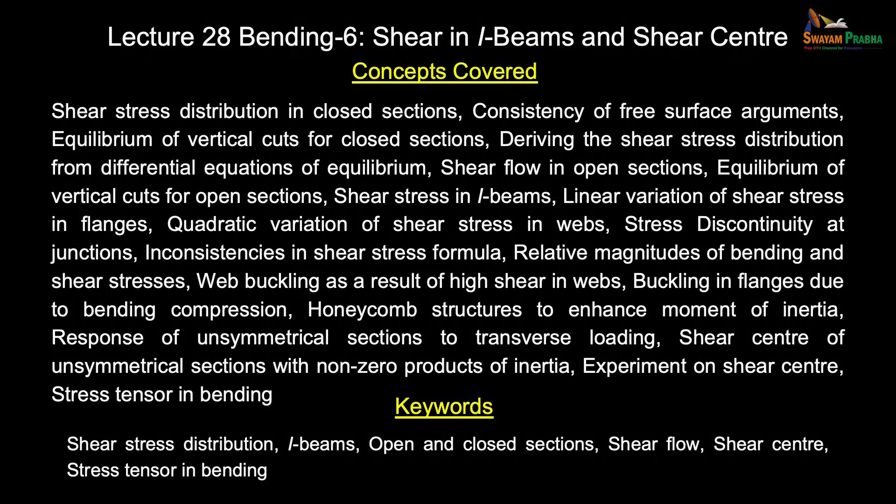Let us continue our discussion on shear stress developed in bending. We are going to discuss certain subtle concepts which are quite important for you to understand the limitations of the equations that we have developed, and also how to use them in solving actual real life problems.

We started with shear stress distribution in a rectangular beam where we had made a horizontal cut, and based on that we have been able to get an expression for shear stress. You should recognize that even when the beam transmits a constant shear force, we saw a variation in bending moment from cross section to cross section.

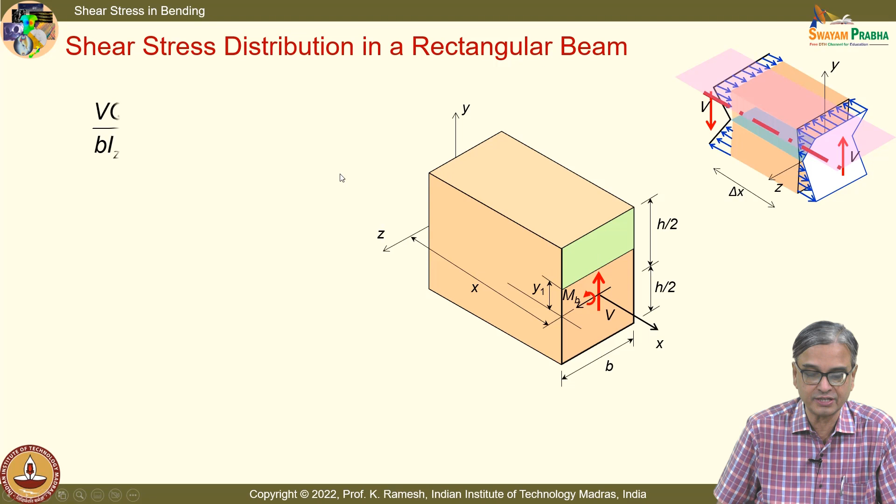You have learnt that you have to find out the Q, first moment of area. That helps you to find out what is the shear stress acting on this surface, which is located at y1. We have also written down a generic expression in terms of integrals, so that when you have a non-rectangular cross section, you can find out this Q comfortably, which you are taught in mathematics courses.

So I get this as V by B I_ZZ integral y1 to h by 2, y b dy, and when I integrate and substitute the limits, I get the expression tau xy equal to V by 2 I_ZZ multiplied by h by 2 whole square minus y1 square.

Obviously, when this area becomes larger and larger, Q also will become larger and larger, and hence your tau will be larger, and you have this maximum when this reaches the neutral axis.

You also have on the top and bottom fiber Q is 0, which we have reasoned out from free surface discussion. Whichever way you have the discussion, you should get one unique answer, only then your mathematical analysis is correct. That is the reason why I go back and forth.

We are also going to determine the shear stress by solving differential equations. That also we will do. All of them will converge to the same answer. So what we understand is top and bottom fiber should be 0.

As I told you, at the center of the cross section Q is maximum, and you get the shear stress variation like this. This is the parabola. I also emphasized all along that shear stress varies linearly in the case of torsion, and bending introduces axial stress which varies linearly over the depth of the beam.

And the moment you come to shear, you find that it varies parabolically. So that is a first observation.

When you make a horizontal cut, we found when the bending moment is varying along the length, there was an unbalance. To keep the cut element in equilibrium, you need to have shear stresses developed. That was the idea.

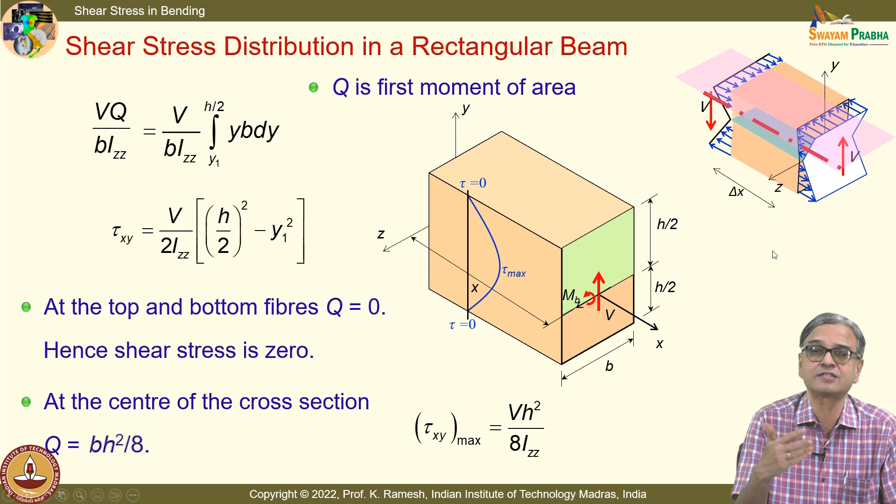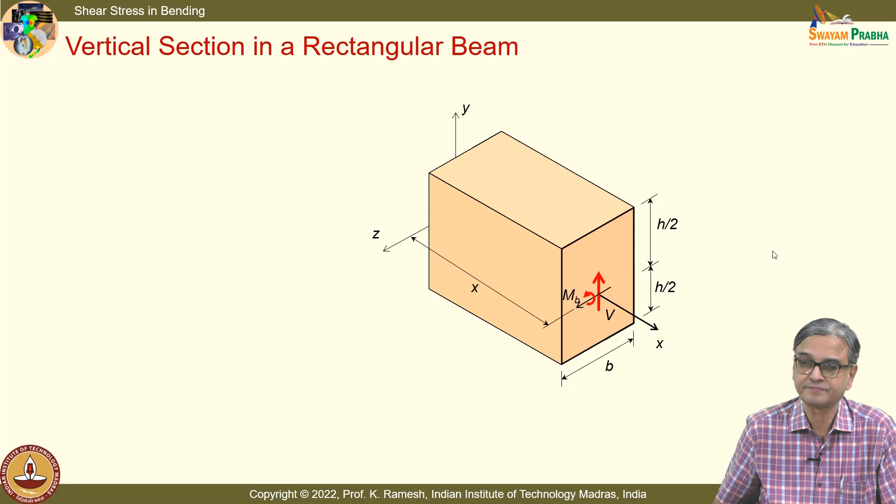Then I gave you a homework. Why not I make a vertical cut? Instead of horizontal cut, let me have a vertical cut and separate out the beam. Let us see when I take the free body and list out what all quantities act on it, we will get an idea how to handle it.

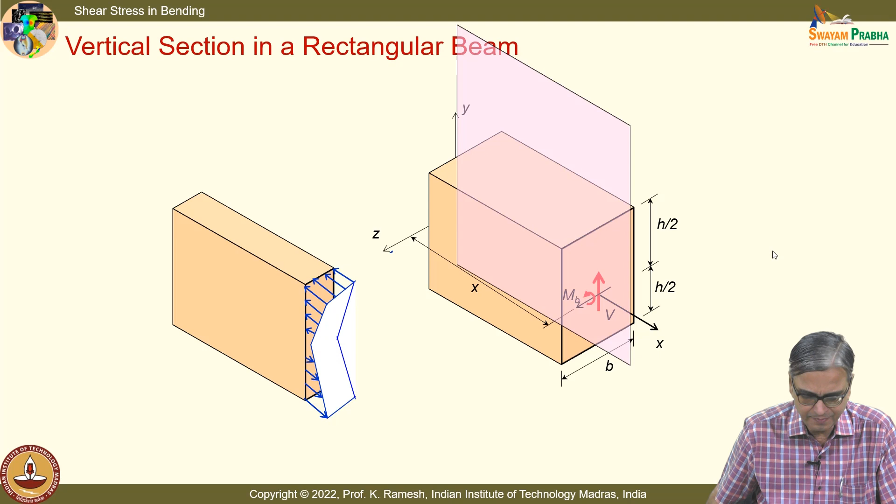So I have the cut portion taken out. Is the idea clear? I have asked you to cut like this, and bending moment varies along the length of the beam. So I will have bending stress variation like this on this surface and bending stress variation like this on this surface.

And you know very well, when I substitute the bending moment, which was smaller in magnitude here, I will get smaller stresses, and I will get larger stresses on this face. This is difficult to draw, I have drawn it to the extent possible. If you can improve the figure further, you are welcome to do so.

Now the question is, will this element be in a state of equilibrium or not? Do you require any additional stresses developed, particularly on this surface? This is a surface that is cut. What is your first appreciation of your understanding? You will have to find out what is it that you have to calculate.

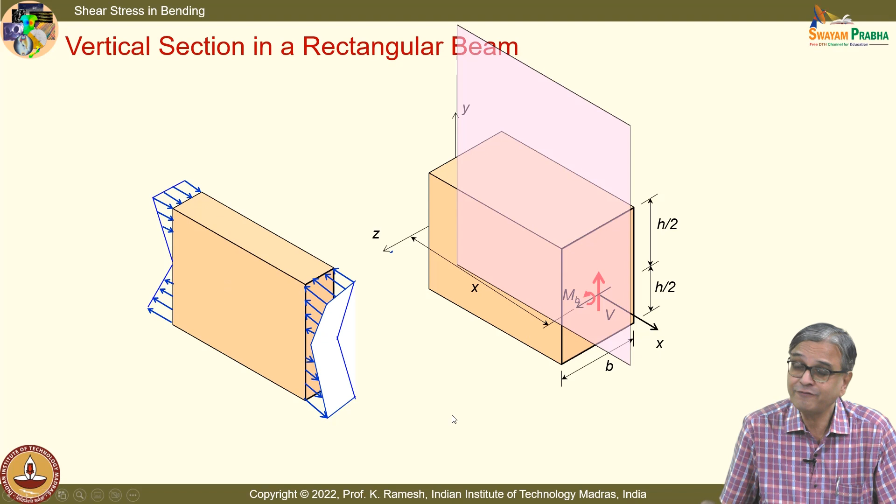What is the net force acting on this face? What is the net force acting on this face? Net force is 0 because I have taken a vertical cut. If I have taken a horizontal cut, net force is not 0. Is the idea clear? So what is the net force?

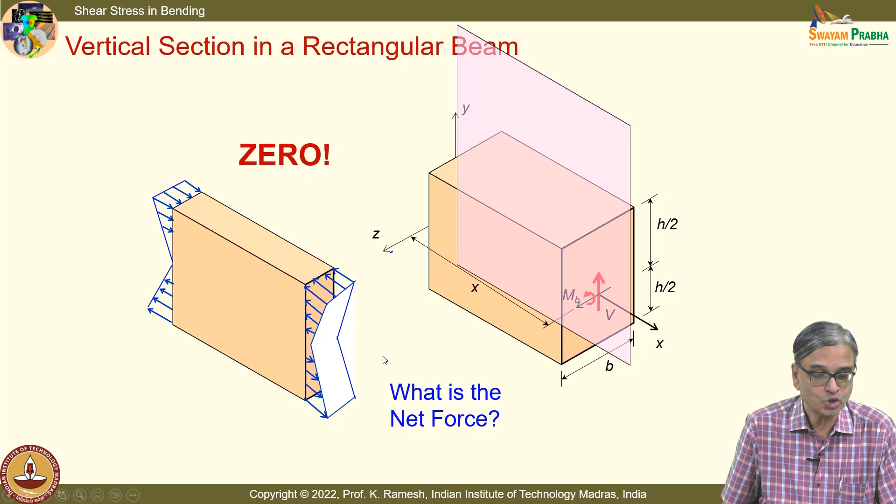And because there is equal and opposite from the bottom to top, it is 0. So you do not have any shear stress developed on this face of the element. Is the idea clear? Very subtle point.

Then we move on to another cross section. See, I said whatever bending equation that we have developed can also be applied to open sections. And move on to the open section.

See, you will have to find out the shear stresses from fundamental understanding. It is not like you have your eyes blindfolded and simply use the equation that you remember, and then get the shear stress. It is not like that. Because I am going to take a counter example.

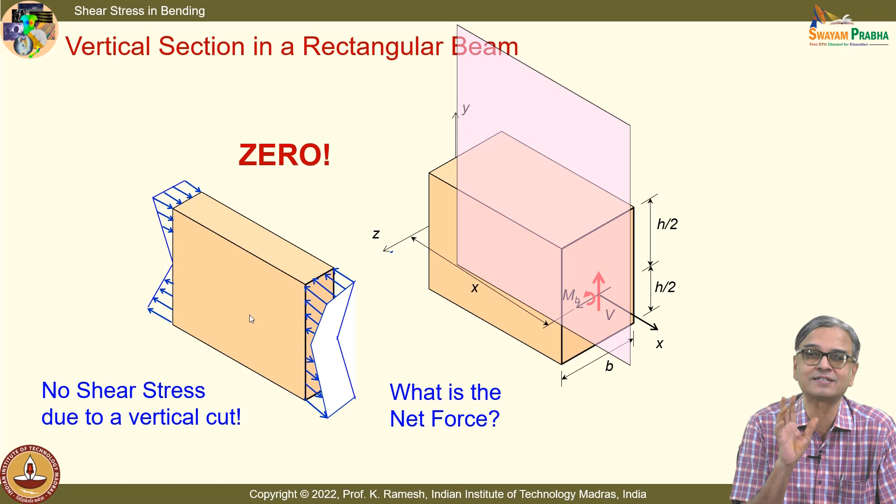I have always been saying shear stress is parabolic in nature. I am going to show something different. And I am going to show when I make a vertical cut, I am going to have something interesting. So it is problem dependent. You will have to understand how the unbalanced force comes into play.

So before we get on to that, we will also use an alternate approach to find out the shear stresses in the case of rectangular cross section. In this course, we have not been utilizing the differential equations of equilibrium. We developed it in the first few lectures, isn't it? We have determined what is the equations of equilibrium, and we will not consider the body force here.

We will use those expressions to find out the shear stress. So you will also get an idea that you can also find out by solving differential equations. It gives a flavor of it because there is no great mathematics involved. It is very simple. If I had to solve this as a boundary value problem, I would have to develop a lot of mathematics before I could solve it, but this I can get a direct solution.

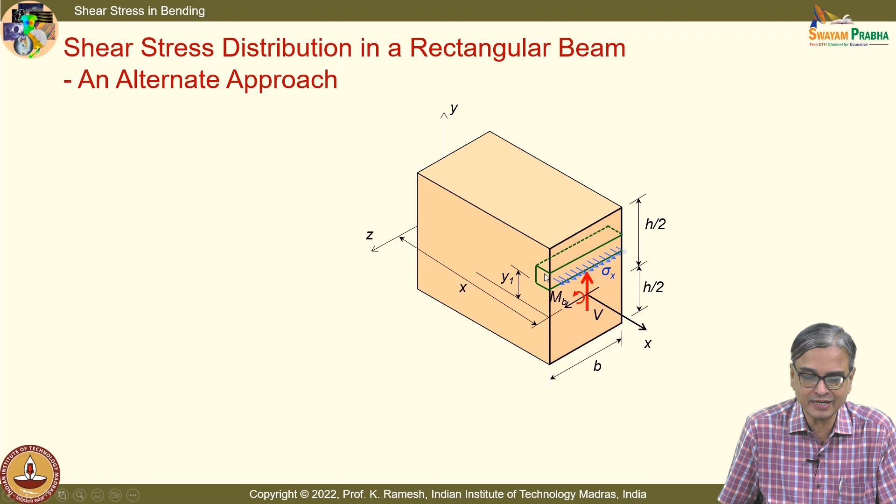So I have an element taken out, it has a bending stress sigma x, and we all know that you have shear stress acting on the surface like this. The idea is how to get the expression for tau xy. And you make an assumption, and we have also determined it like this: the shear stresses are distributed uniformly across the width of the beam.

And you can get the expression by integrating the equilibrium equations. Can you write the equilibrium equation when body force is absent and restrict it only to x and y components? Do you remember? Because when we do that in rigid body mechanics, you write fx equal to 0, fy equal to 0, fz equal to 0, you do that. And similarly, we also saw by using those expressions a differential equation.

You have that as dou sigma x by dou x plus dou tau xy by dou y equal to 0. Dou tau yx by dou x plus dou sigma y by dou y equal to 0, in the absence of body force.

And our interest is to find out what are the shear stresses. And we know from your flexure formula what is the expression for sigma x. So essentially if I handle this differential equation, I am in a position to get mathematically the expression for shear stress. But you have to use all the understanding that you have developed as part of the interrelationship between bending moment and shear force, all that you have to know.

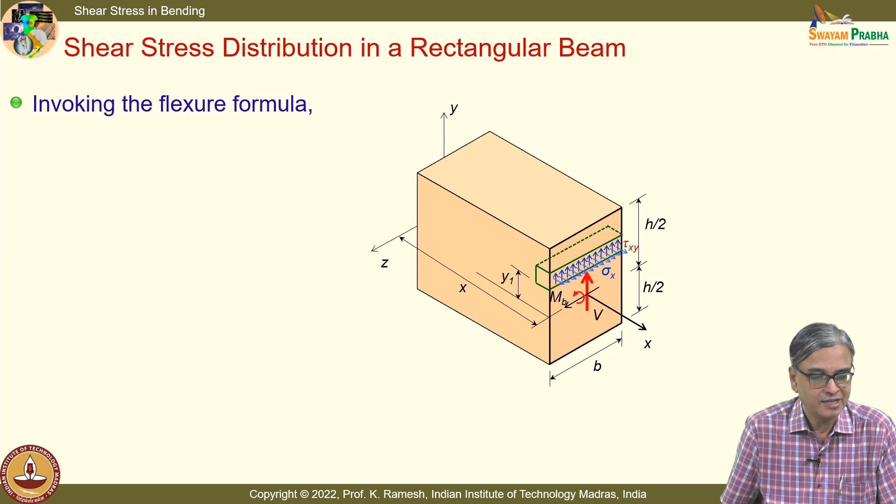So what we are going to do is, I have this as minus dou tau xy by dou y equal to dou by dou x. I can replace sigma x in terms of what we have determined from the flexure formula. I keep repeating this flexure formula because if you know that, you can solve a variety of problems related to bending.

And you have this as mb by iz equal to minus sigma x by y equal to E by rho. So I can replace expression for sigma x in terms of bending moment and the moment of inertia. I write it here: minus mb y by iz.

And do you see, we can make another simplification, because our idea is to relate the shear stress to the shear force, that we have written as a force V, isn't it? When you look at this expression, do you recall how we can handle this? I can have dou mb by dou x, go back to the interrelationship, and then write that as Vy by Izz. This you have to know, whatever we have developed—fundamentals you have to know, apply the fundamentals and simplify.

So, once you have this, it's just a question of integration and then get it, that's all.

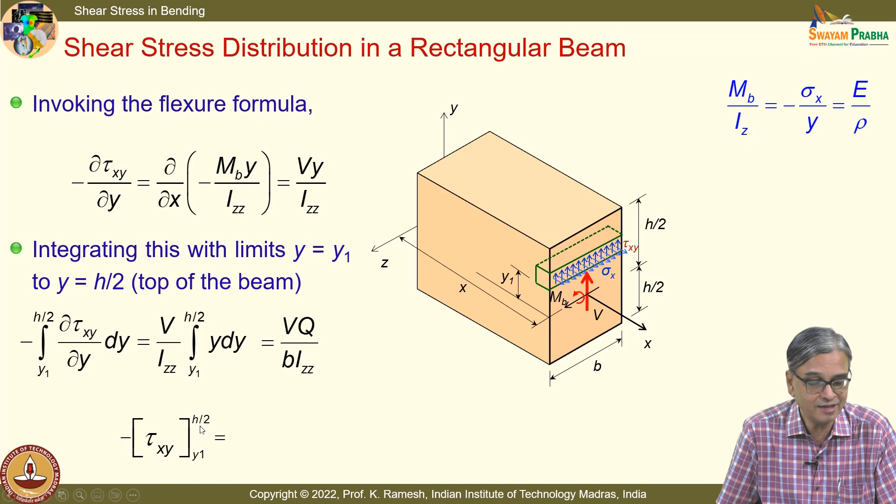And this you have to look at it very carefully. What happens to tau xy at h by 2? So, that is what you will have to be careful about. So, I have this as v by izz y squared by 2 from y1 to h by 2, and tau xy equal to v by 2 izz into h by 2 whole squared minus y1 squared.

This was the expression that we were able to calculate based on vq by bizz. So, you have the identical expression, and you have the satisfaction that you have also used the differential equations of equilibrium, and it also gives a confirmation that what we have done are consistent mathematically.

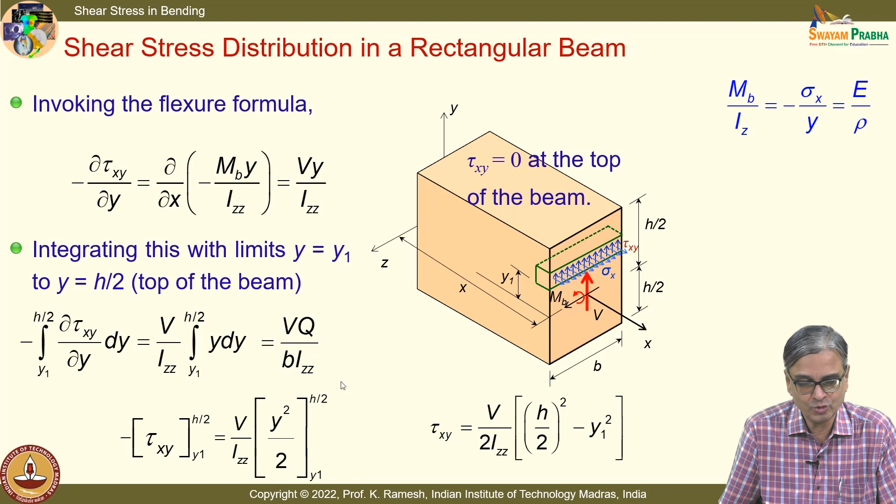And near the neutral axis, these magnitudes are higher, and far away from the neutral axis, the magnitudes are smaller. See, what you understand in bending is, when bending stress is maximum, shear stress is 0. When bending stress is 0, shear stress is maximum.

With one exception, when I have a load application point like in a 3-point bending, shear stresses are very high near the top surface. It is not parabolic, it is non-parabolic, which needs to be taken care of while constructing the beams. For your analysis, you may say I stay away from the load application points and I solve my basic mathematical requirement. But when you go for construction, you have to recognize that these are the variation.

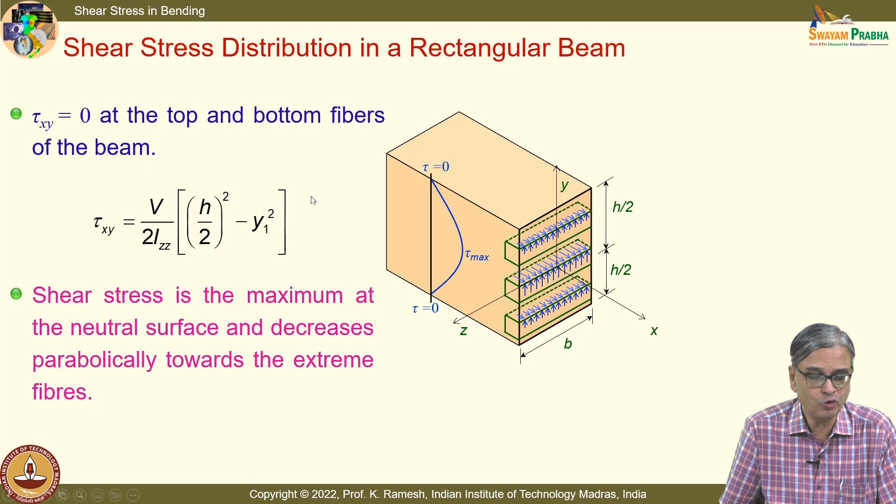So, you have this varying parabolically, the same expressions are repeated. If you have not written it down fully, you can correct it.

Okay. Now, we shall go and see what happens, how to find out the shear stress in the case of an I-beam.

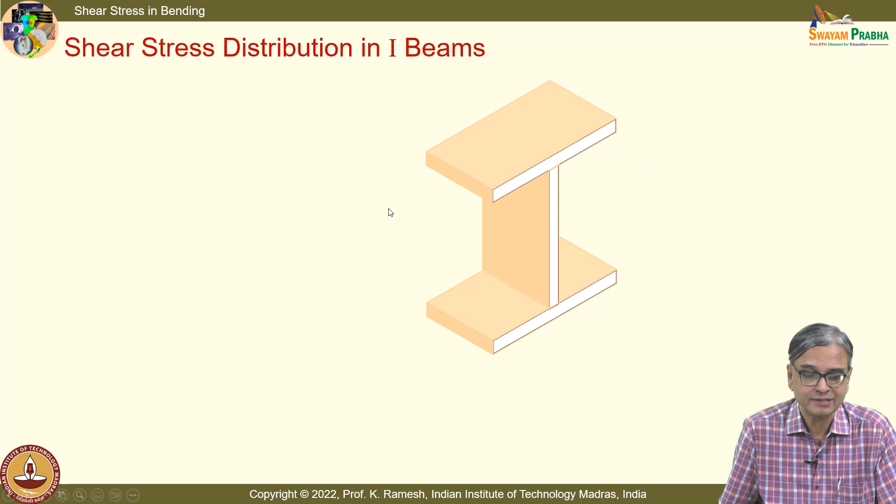See, I will have to make a horizontal cut. I will also have to make a vertical cut. Only then I will be able to find out the shear stresses in all parts of the I-beam. Even before I go and do the calculation, let me show what way I would calculate this Q. The same Q is going to come in some other form. Let me see whether you look at and you are able to guess what is happening.

These are all the geometrical details. You know, when you write it in isometric view, the distances appear like this. And I have a shear force acting. I have to find out the shear stress variation on the flange. This is called a flange. This is called a web. And this is again called a flange.

And for me to find out what happens if I put a horizontal cut, you can anticipate that horizontal cut will give me a variation of shear stress over the depth of the beam. We have already seen what should be the variation. We have seen that the variation should be parabolic, which is different from what you have looked at in torsion or bending, only the axial stress.

We will also have to find out what happens on the flange. Suppose I take a vertical cut, what do you anticipate when I make a vertical cut? Will that vertical cut remain in equilibrium, or will it have an equilibrium and some stresses have to be developed?

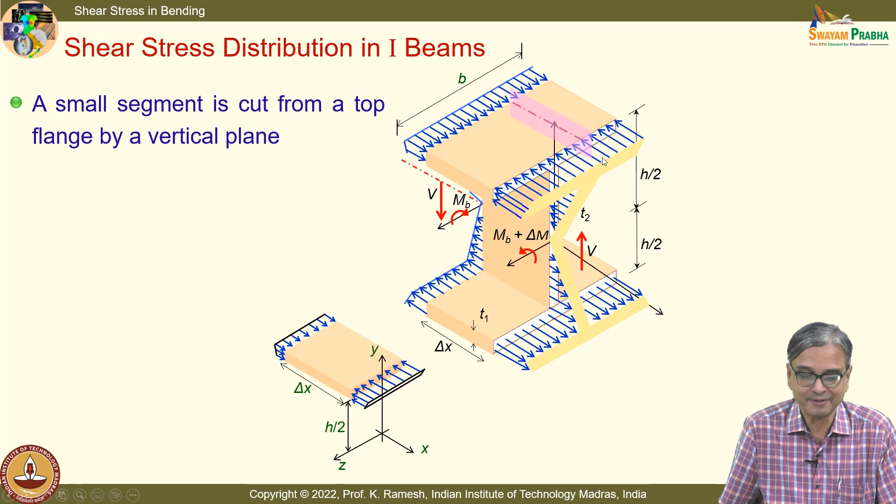So you have to go back to the fundamentals, how we started calculating the shear stress distribution. I am going to make a vertical cut. I am talking slowly so that you have opportunity to write and take a record of this diagram.

I have taken a vertical cut, and you are shown stresses on this surface, stresses on this surface. For your benefit, the board is not smart right now, I will make the board intelligent. You make a neat sketch of it to the extent possible, so that you get the idea.

I have a vertical cut here, and when I make a vertical cut on the flange, this portion of the flange will not remain in equilibrium. When I make the board smart, it understands that it is not in equilibrium, so it will move, and this has to be in equilibrium because the whole beam is under equilibrium. So you will have stresses developed on this surface. Is the idea clear?

So you have to fundamentally investigate what happens when I make a cut. Particularly when you want to understand shear, you have to go to the fundamentals. Even though we may use the readily available equations for our calculations, you need to understand how those equations have been developed and apply those steps carefully. Otherwise, you can make a very complicated problem, or a simple problem complicated for you. You have to understand, it's not just the use of expressions, how the expressions have been derived is equally very important.

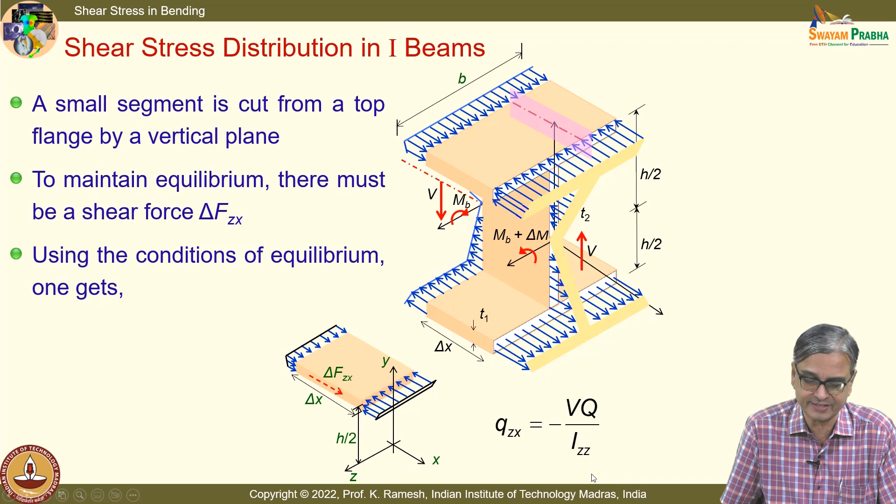And once you have done this, other steps will be very similar. So using the conditions of equilibrium, one gets QZX equal to minus VQ by IZZ. I am skipping the steps, so you can go back and redo the steps, very similar to what we have done for the horizontal cut.

We have also discussed the meaning of shear flow, this is force per unit length. When you divide by the width, you get the stress. And you have this area, these are all very nicely drawn sketches. So you integrate it and then find out what is Q.

And now you have to tell me, I will also show you this. This is the area A1. So when I have to find out Q, I have to actually find out for this area. Is the idea clear?

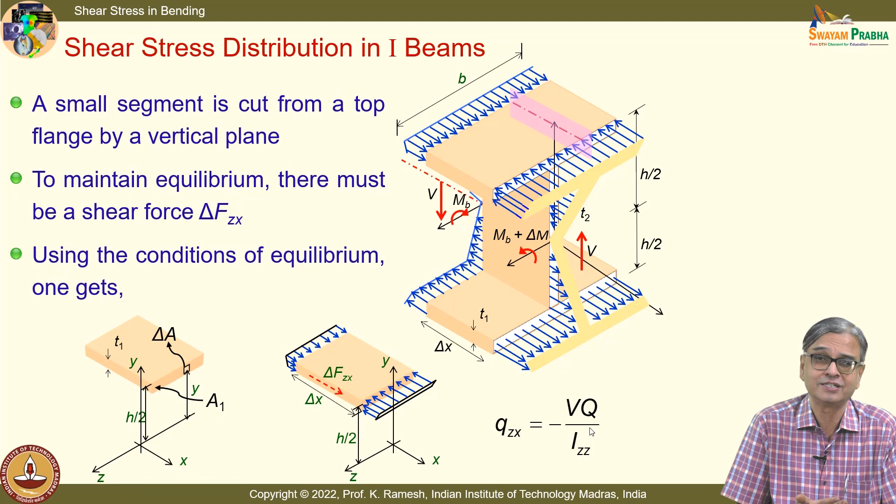So the basic expression looks very similar, but how Q varies when I want to do it on the flange is different. I go to the flange, and when I pictorially represent Q, let me see how many of you guess what is happening. If I want to find out the stress on this surface, I will have to take this much area and calculate Q. Suppose I want to come to a portion here, I will have to have a larger area. How do you anticipate Q to vary? Mathematically, is it linear, parabolic, or cubic?

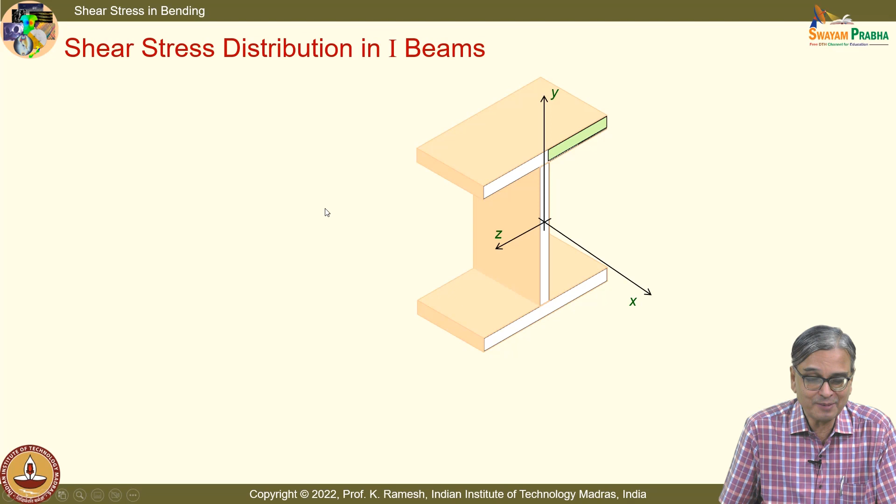Apply or go back to your mathematics. I am showing you the area, and then it is increasing like this. YdA, that's all. What remains constant here? Y remains constant. So you have to appreciate shear stress can also be linear in a beam.

Where it is linear, you have to look at. Everybody thinks that shear stress varies parabolically. Fine, it varies parabolically in some portion of the beam. You can also have a shear stress component tau xz that varies linearly with maximum at the junction to 0 at the ends. So it's very interesting. So unless you understand how the equations have to be derived, you cannot use the expressions for shear stress blindly.

You have to apply your thinking. So I will have this tau xz equal to tau zx, equality of cross shears. That turns out to be minus VQ by T1 IZZ, where T1 is the thickness. And even though I have expressions like this, normally when you get an expression, you see that it is applicable everywhere, and then there are inconsistencies. We will also have to discuss the inconsistencies.

Particularly this junction is going to be a trouble spot. This junction is also going to be a trouble spot. Recognize that these are trouble spots, but find out a way around to get over it. That is what engineers do.

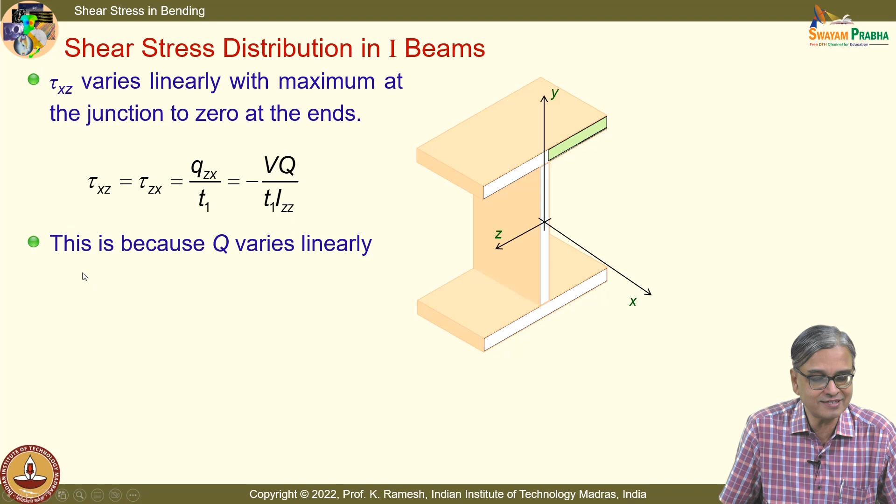So you have this varying linearly because Q varies linearly. On the other hand, if I take the horizontal this one, when I do this, my y also will change. So the change is parabolic for the shear stress tau xy. So you have tau xy as well as tau xz exist in the case of an I beam.

You may have to investigate when you take a channel. You should look at how it is loaded. If you take an L angle section, you will also have to find out what is the way that you have to make a cut. So the moment you come to open sections, you have to understand the fundamentals, how the shear stresses are developed.

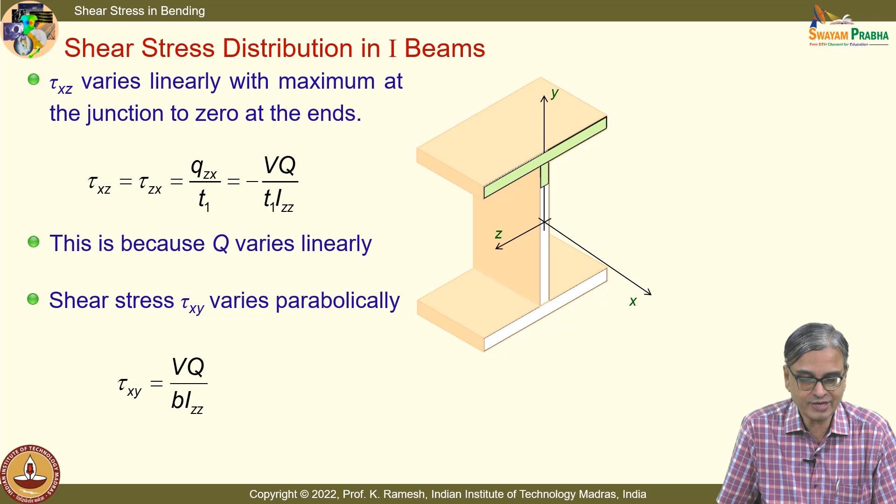And you also have a nice 2D picture. I have this shown. This you can easily draw, and then make your ideas clear. So I have tau xz equal to minus VQ by T1 IZZ.

When I want to calculate this, I will calculate only like this. I have a small area and have this y, and then the area increases, and then I have this y remains constant. If I do this, the y remains constant, area keeps increasing. So the shear stress will be 0 here and it will linearly vary, reach a maximum in the junction and die down. Since we have put this as negative, this is what is shown here. Tau xz is 0, it reaches a maximum here and then goes to 0.

So shear stress has two different distributions. If I look at tau xz based on the reference axis that we have taken, it varies linearly. This is what happens in the case of the flange.

And we also have the expression when we have tau xy. Tau xy is VQ by B IZZ. See, b is the width. And you also have a sudden jump in the junction. The width was B1 and suddenly it reduces to t. Is the idea clear? For the same area, you will have two different points, one corresponding to the flange and another corresponding to the web.

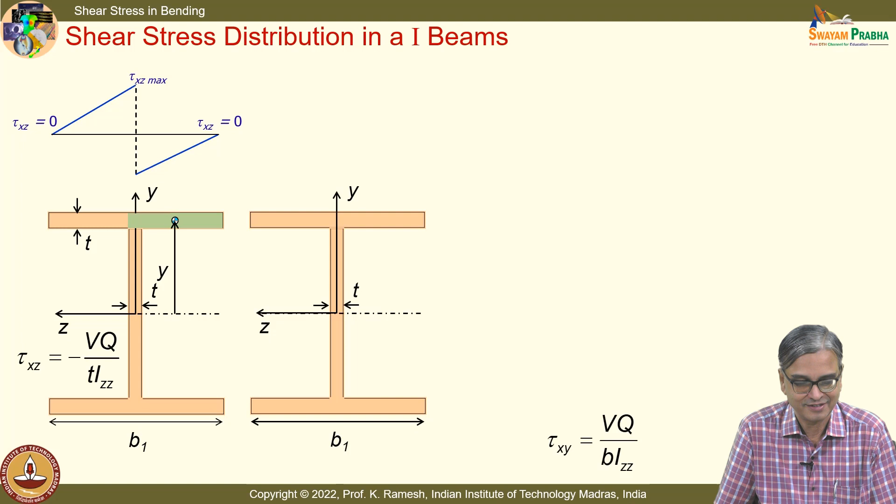And we know that this varies parabolically. I will just put the sketch. So I have this point I can find out, that is VA1 Y1 divided by B1 IZZ, because the width is this much, and when I am making a cut here, I will have the shear stress on the flange will be like this. But if I consider the same point forming part of the web, I will have a value as VA2 Y2 divided by T IZZ. It goes up.

Then again the whole thing gets replicated parabolically. So I will eventually have a curve like this. You will have a maximum value at the neutral surface, the neutral axis. So I have this variation like this.

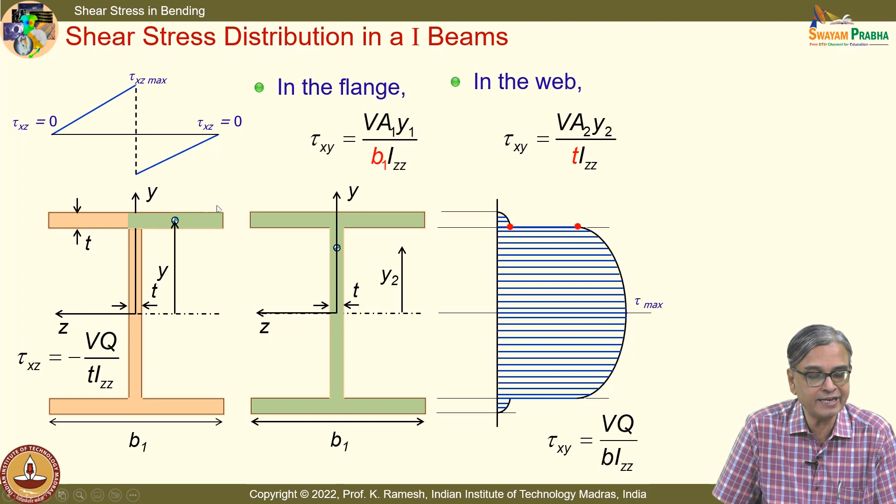So once you know how to interpret this, any cross section given, suppose I give a T section, you can also draw schematically. You do not have to go to a computer to plot the graph, you can get that schematically. So what you find is, in the plane like this, when you are looking at tau xy, it varies parabolically like this, and you have this varying linearly on the flange. I have also shown it in various different ways, to drive home the point.

We will also look at what are the inconsistencies in the shear stress formula. We have the expression tau xz equals minus VQ by t Izz.

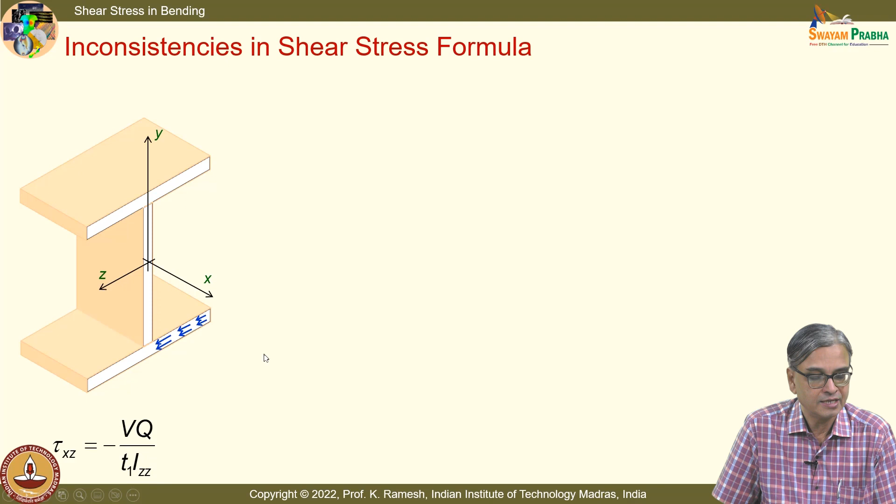The important discussion is you have a junction here, these junctions, where there are inconsistencies in our expressions. Recognize the inconsistency, handle it with care. In this I have shown these as sharp corners. In practice it will not be a sharp corner, you will have a beautiful fillet there, because you would like to reduce the stress concentration.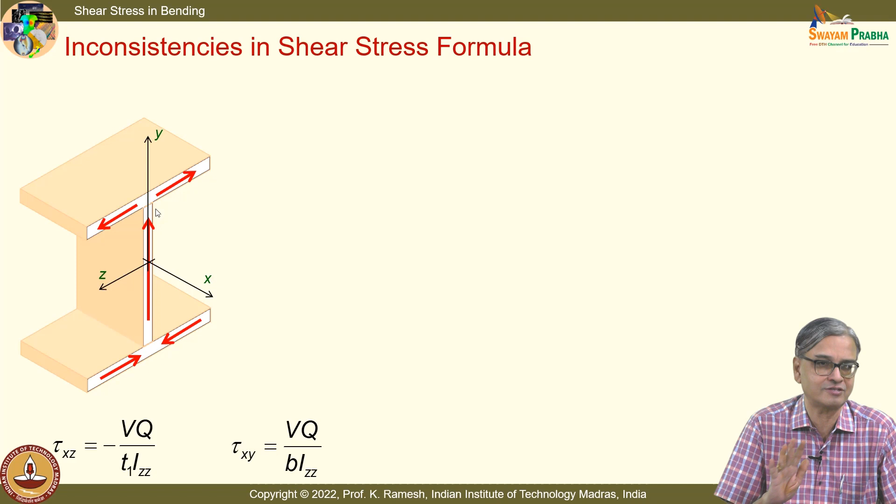The shear stress varies parabolically. I have drawn it for the plane of symmetry, and the shear stress tau xz varies linearly. The shear formula is based on the flexure formula, hence all limitations would equally apply. Whatever limitations we discussed on the flexure formula apply here, because I have a plane of symmetry, and you have this junction.

I have junction 1 and junction 2, and we found these are fuzzy zones. I have two different values, and if some of you are very alert, you would have also raised one more question.

We had done an exhaustive discussion on free surface. I have a top surface where no load is applied, and a bottom surface. Similarly, I have the top surface of the flange and the bottom surface of the flange. When I look at my shear stress distribution, it is 0 on the top surface, satisfying our free surface requirement. But when I come to the bottom surface, that surface is free. If you look at the expression, you have a value.

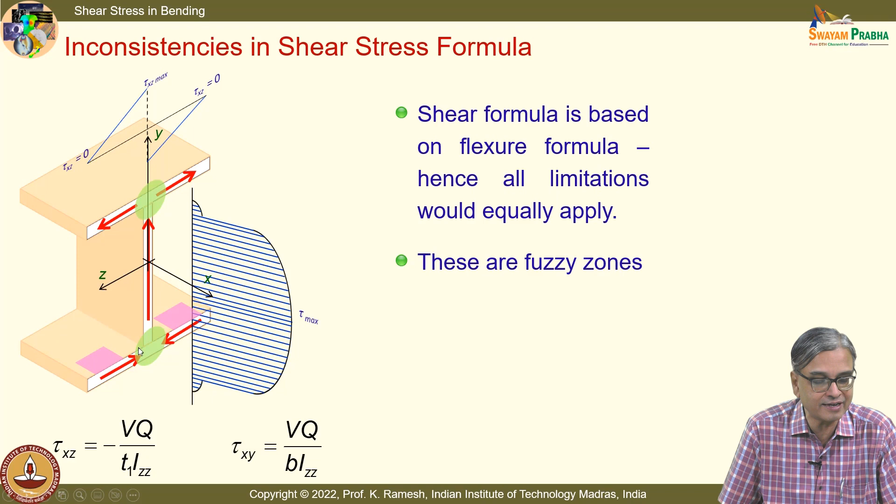I have just shown a small portion as red. This is applicable for the entire length of the flange. You find shear has to be 0, but the shear formula predicts a small value. You have to accept that. There is a contradiction.

How do I resolve the contradiction from an engineering point of view? We have already seen the magnitudes of shear stress are much smaller, at least 20 times, in the case of a rectangular cross section. So if I have a slender beam, you have to apply all this to a slender beam. The shear formula is based on the flexure formula, with all its limitations. So when I have a slender beam, shear stress determination from these expressions is reasonably accurate.

If you violate the slenderness of the beam, then you have to look for other formulations. You have the Timoshenko beam theory, which improves the flexure formula itself as well as the shear evaluation. Those are postponed for your higher studies.

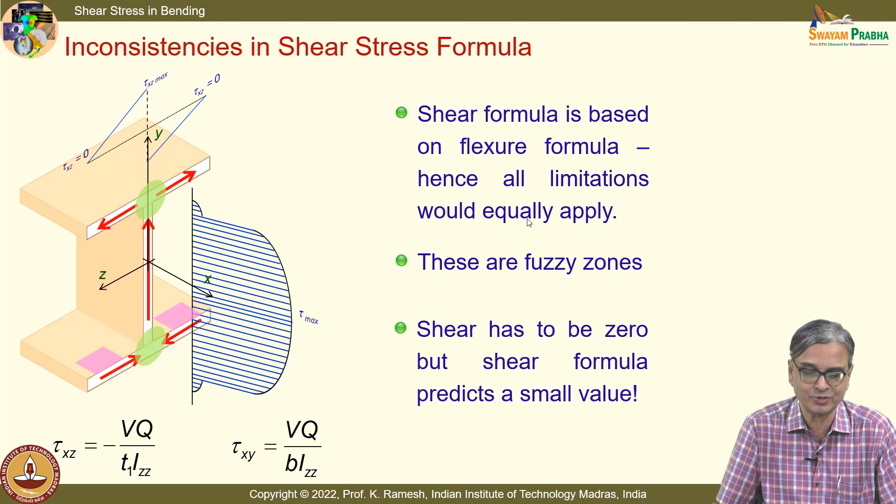In order to drive home the point about relative magnitudes, one focus is to illustrate what the variation is. The variation is also very, very important. The other aspect is what are the actual magnitudes.

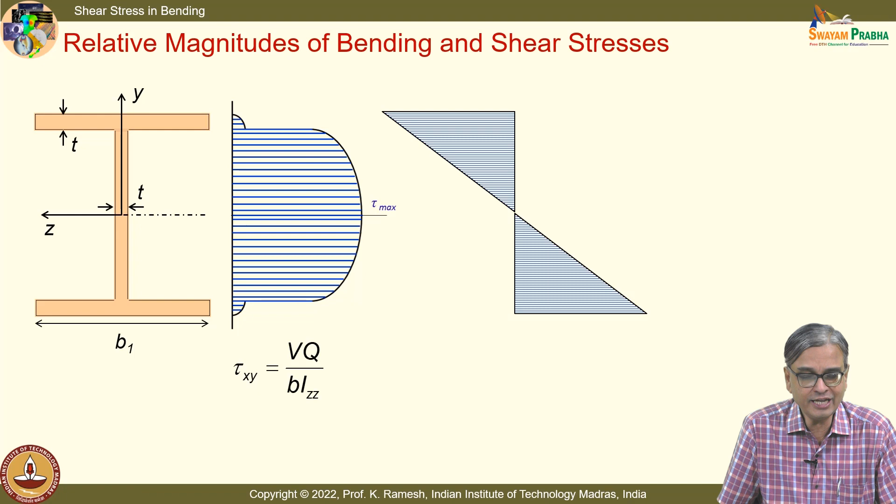Normally books stop here, showing the bending stress variation which varies linearly, and the shear stress variation which goes parabolically, giving a very nice curve. But these are all looking very nice even though there are inconsistencies. If you really look at the magnitudes, it is hardly anything here. So even though my formula gives some number, it is very close to 0, so it satisfies what should happen in reality. That is why we do not worry about it. When it matters, we worry about it - when shear stress magnitude matters, like at the load application point, we immediately take corrective action.

If the plots are drawn to scale, which we have also discussed in the context of the rectangular section, I am also discussing in the context of the I section to drive home the point, which is missing in many books. We have applied the flexure formula.

The only restriction was that I should have a plane of symmetry. So I can find the bending stress using this expression, look at the bending moment diagram, get the bending moment, and simply apply it. Look at the shear force diagram, get the value of V, get the value of shear stress. You can do your design course comfortably. And to get the shear stress, you also have to find Q, which means progressively finding what happens at each level, and then plot it.

It will be a parabolic plot for all of this cross sectional parabolic plot. But the story does not end here. There are also inconsistencies. Even if I take a simple circular cross section, we will also discuss the way the shear stress has to vary.

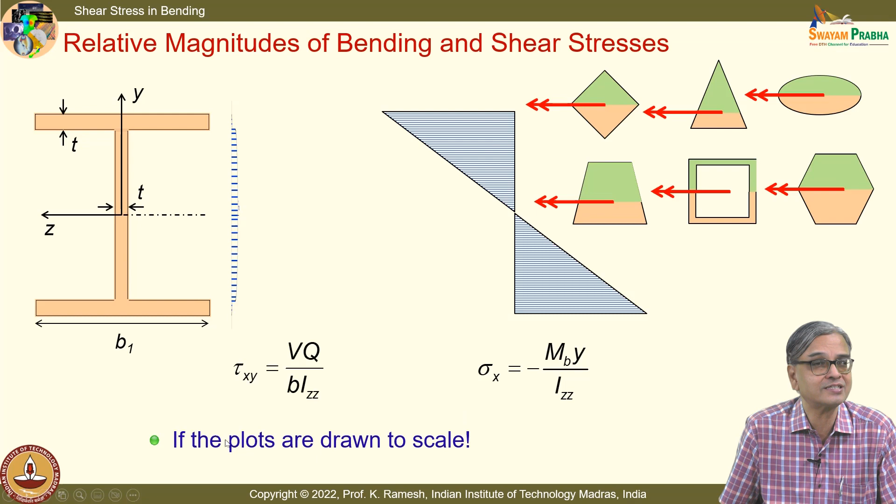So what you have to appreciate is, as long as the beam is slender, from a design point of view, you will know how to calculate the axial stress developed due to bending and the shear stress developed due to transmitting of shear force or variation of bending moment, whichever way you want to do that. So I said where we have to worry, we have to consider shear stress.

Let me ask, I take a rectangular cross section. Now you are all taught, if it has to transmit essentially bending load, the inner core is not participating, and you want to be a very optimal engineer. That is why you should not do optimization to the hilt. God has given you two kidneys, He has not given you one kidney.

He was very careful. Suppose I want to remove the material and then make an I section, you all know the inner core is not participating. What is the limit? Can I keep on going like this, remove all the material?

You should not do that. What do you anticipate? I have given you the clue, that this also has severe shear stresses. What happens, where does this happen? This happens at the central core.

So what would happen when I have shear stress? How do you visualize it from our earlier discussion? We have been discussing that a shear stress, pure shear stress, can be looked at as tension and compression. The moment I have compression, what will happen? I can have buckling.

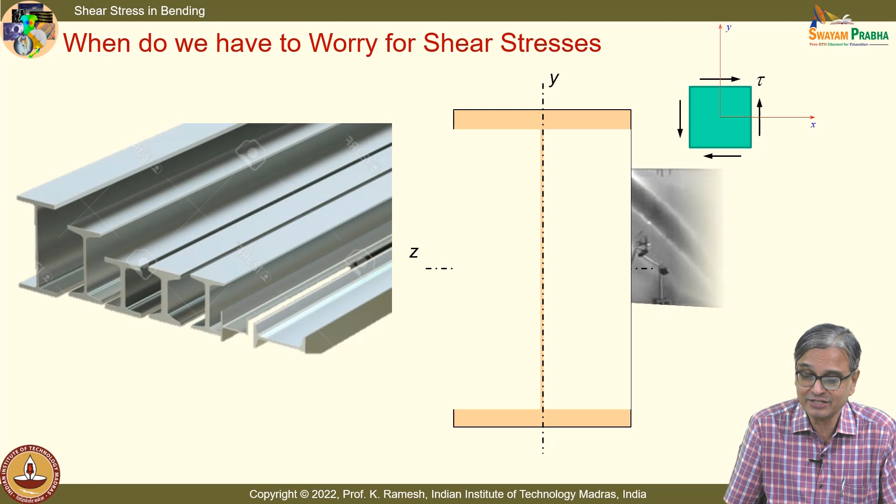I can have one form of buckling which is recorded in literature. You have this buckling, and when I put this at 45 degrees, you see there is a compressive stress developed. So do not handle shear stress as innocent.

It can be very damaging to you if you do not recognize it in another avatar, because we have seen when you look at the Mohr circle, you should recognize the same stress tensor can appear in different ways. So it can precipitate failure in one form, but you can also have failure in another form. I do not know how many of you have noticed it. See, the reason people fear bending is I will have tension as well as compression.

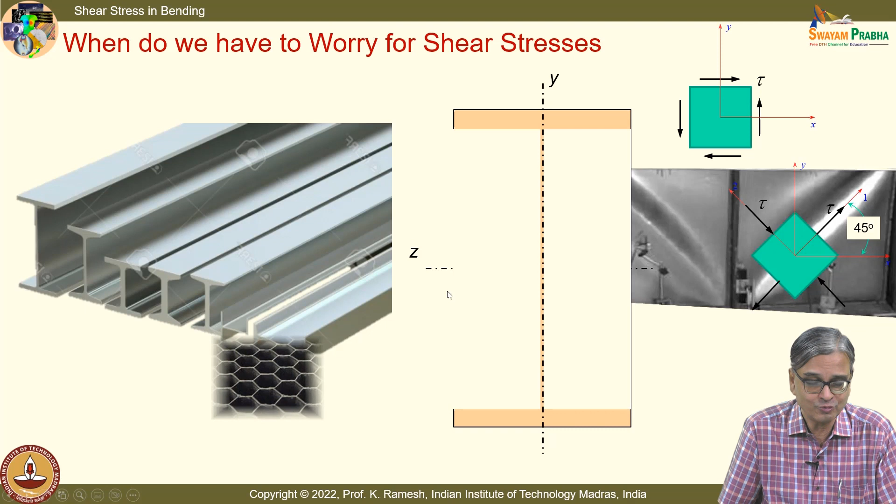Even if I take a simple rectangular beam. So before we go into that, you also have honeycomb structures. In all space structures, they use honeycombs to make the web portion lighter, and then have the flanges, so that I will have a good inertia. That is how it is done. That is one way of practically handling this.

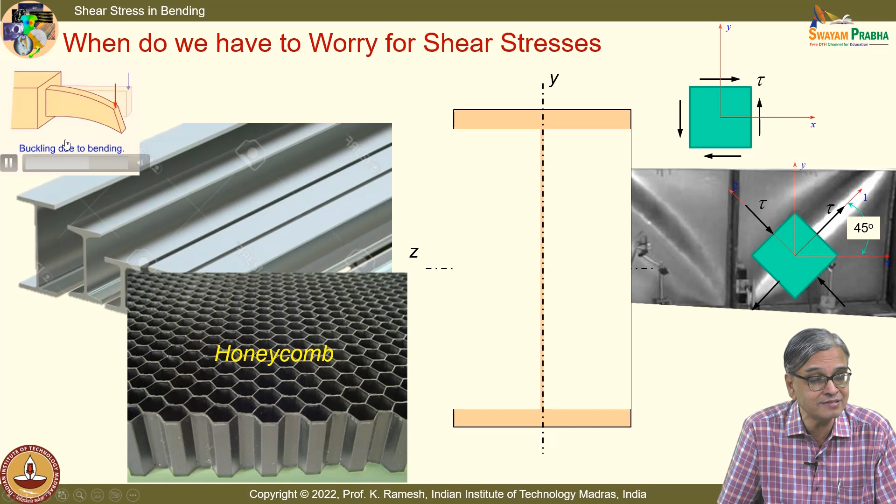And then even if I take a rectangular beam, because I have tension at the top and compression at the bottom, your flange also can buckle. Forget about the web, here I talked about the web. Extreme condition, I showed that it is almost like a thin plate. I can also have flange buckling, and the flange buckling can make the beam bend as well as twist. Is the idea clear?

So you will have to worry, when you are deciding the cross section, find out the extreme situations. Do not simply reduce to maximization of one parameter. You will have to holistically look at the problem and take a decision.

I have an I section, and we have already looked at how to put the shear flow, and I can construct a channel out of this. Suppose I knock off this and knock off this, I can construct a channel out of this.

Do you anticipate something? Because the diagram is drawn with arrows. Suppose I knock off this or cut this off, do you anticipate something happening to the beam on the strength of what is shown as arrows here? Anybody looks at it? I could see some hand movement, that's correct. The hand movement should be translated into words.

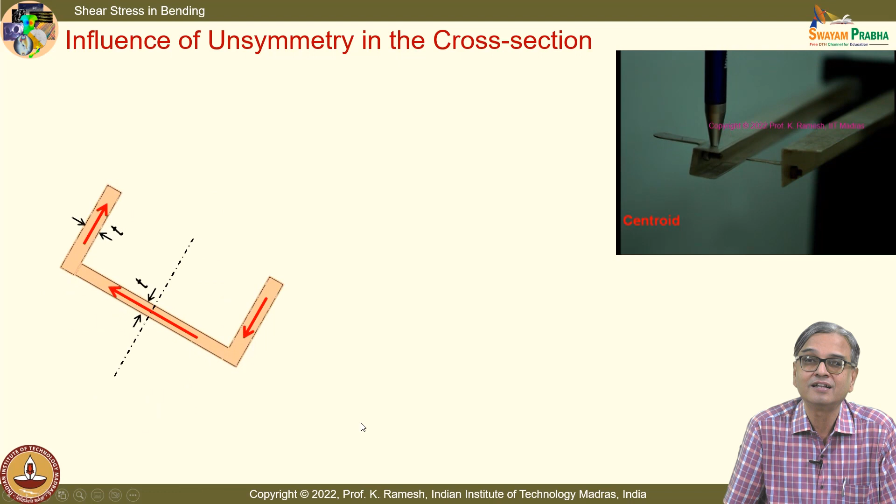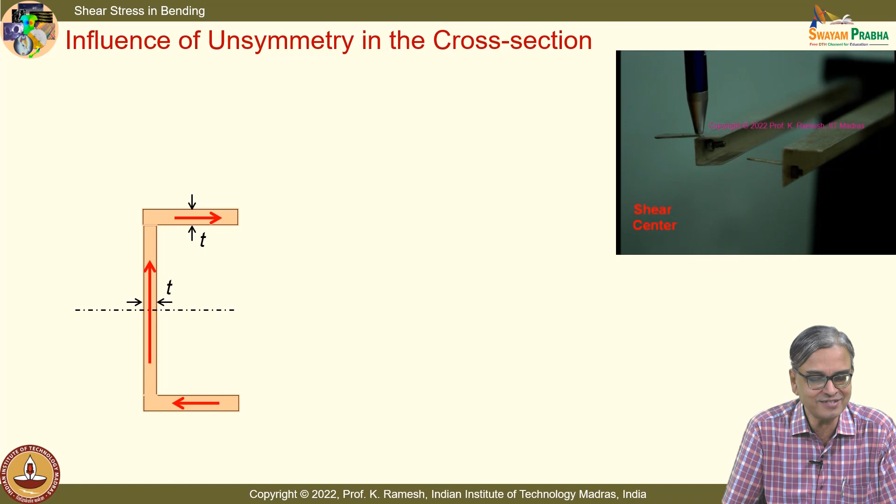To drive home the point, I have to tell you that there is unbalance, so this has to twist. I have always emphasized that we should look at the experiment and convince ourselves what happens. Is the idea clear? We will also look at the experiment, and you have a concept called shear center.

Please write this down. If I apply my bending load, whatever load causes bending, not along the centroidal axis but along a point like this shear center, which is away from it, you find that these two form a couple. It opposes the couple here, so it will not twist, it will only bend. I am telling you theory, but I will demonstrate by an experiment, because we have always verified everything with an experiment. Is the idea clear? We are not just taking this on face value.

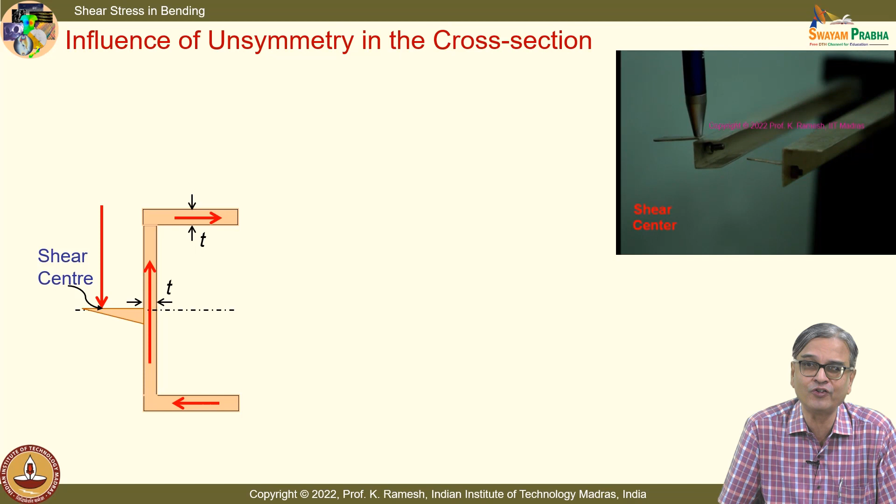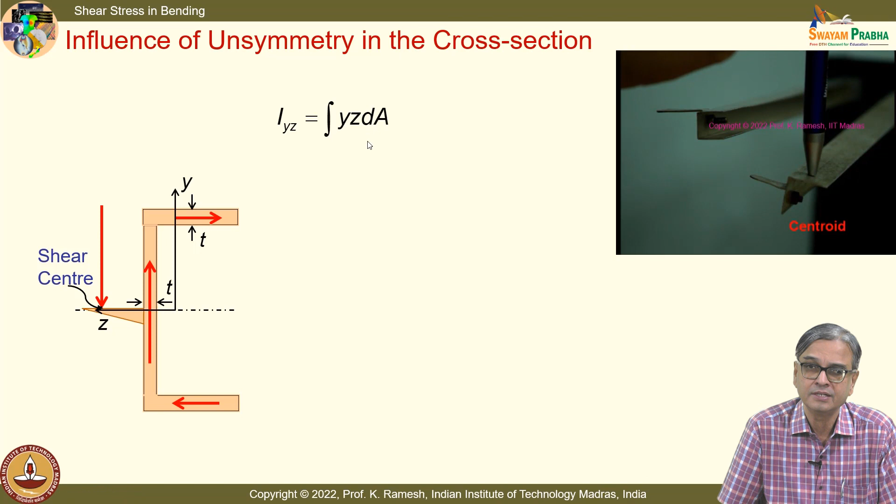I don't know whether you are able to see, but I have applied it at the centroid. If I do it at the shear center, it will not twist. Can you see that this line is not straight, it is getting twisted? I will also show a bigger picture. Suppose I apply it outside, it will only bend.

That is like putting it here. For clarity, I have shown a large distance, but in reality it is small. We will see that also in a bigger diagram.

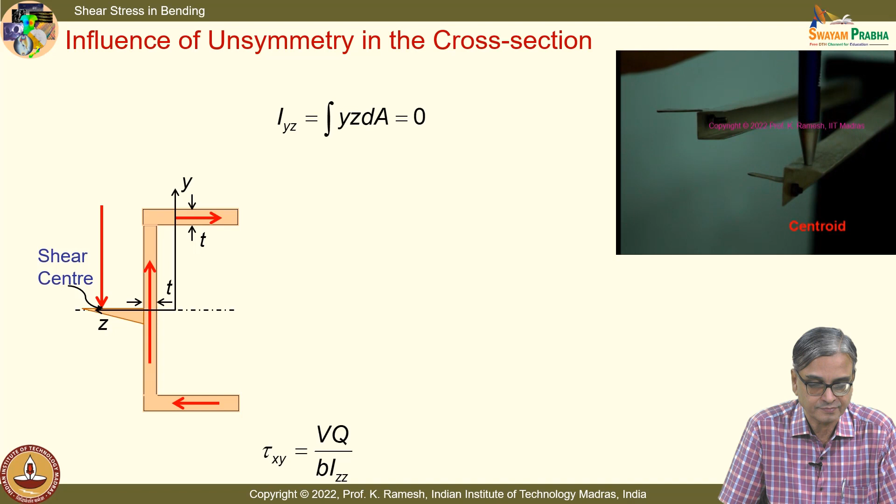So I have tau xy equal to VQ by B Izz, and then I have tau xz also. When I take the same channel like this, for this case IYZ is 0, because this has a vertical plane of symmetry. My loading plane is like this, and it has a plane of symmetry. The plane of symmetry determines what happens to IYZ. See, this is also a channel, this is also a channel.

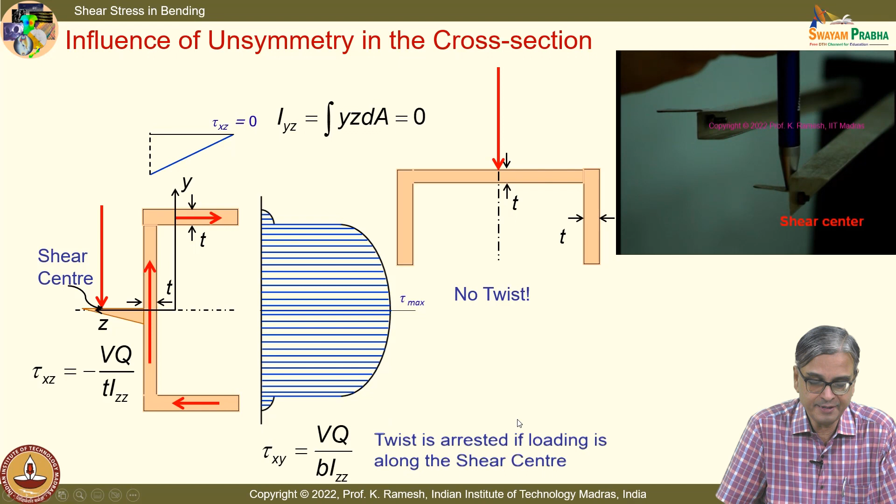I can put the channel like this and apply my bending theory, and do all the other calculations. I can do the calculations here too, but if I apply the load along the y axis, this will also get twisted. I should apply it slightly away. We will see this in a bigger diagram. You have to appreciate that twist is arrested if loading is along the shear center.

It is a concept, a conceptual development. There is something called shear center — funny name, but that is what you have to look at. If you apply the load along that axis, it is not going to twist. Somebody coined it as shear center, and it got stuck.

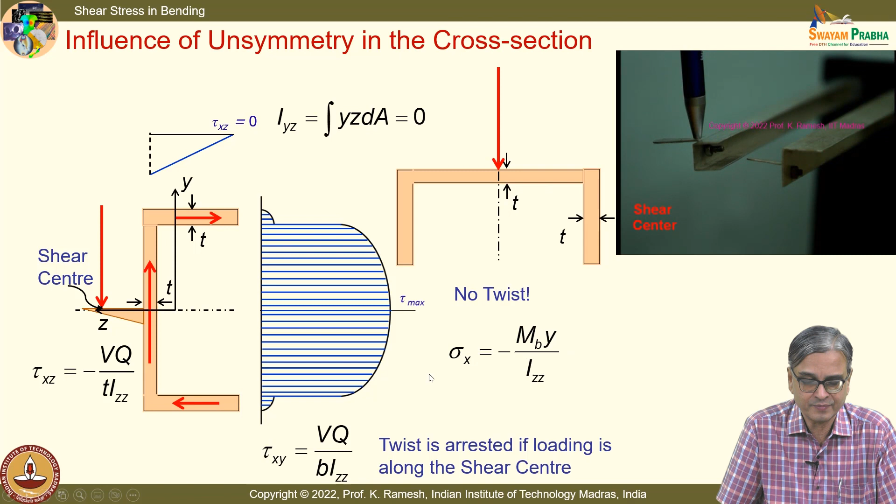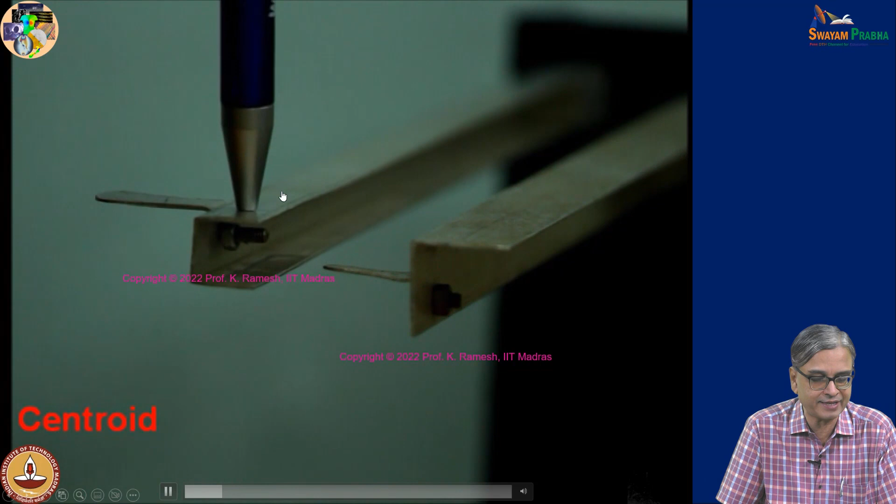So you can still use the expression for normal stress from bending comfortably here. Let us see the test again. Please make an observation on what is happening. Do you find that this is inclined? It is very clear in this animation. It was so difficult for me to press because this is made of aluminum, not plastic. You see a marked difference, don't you?

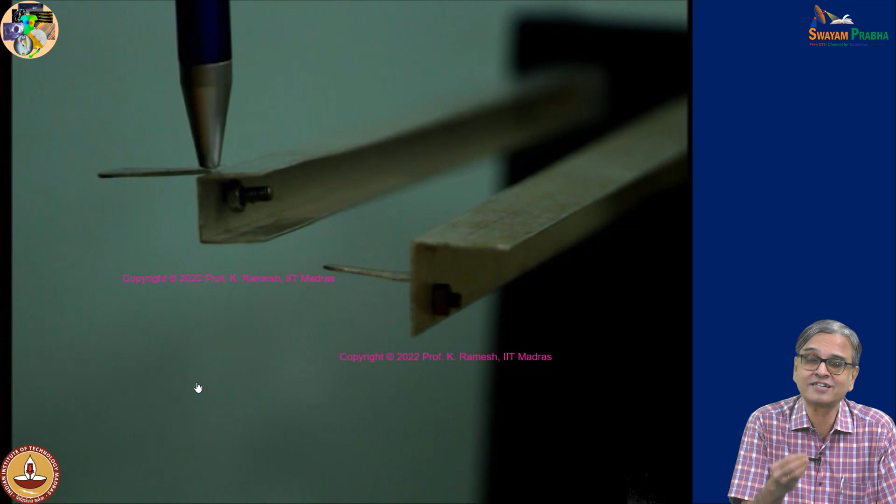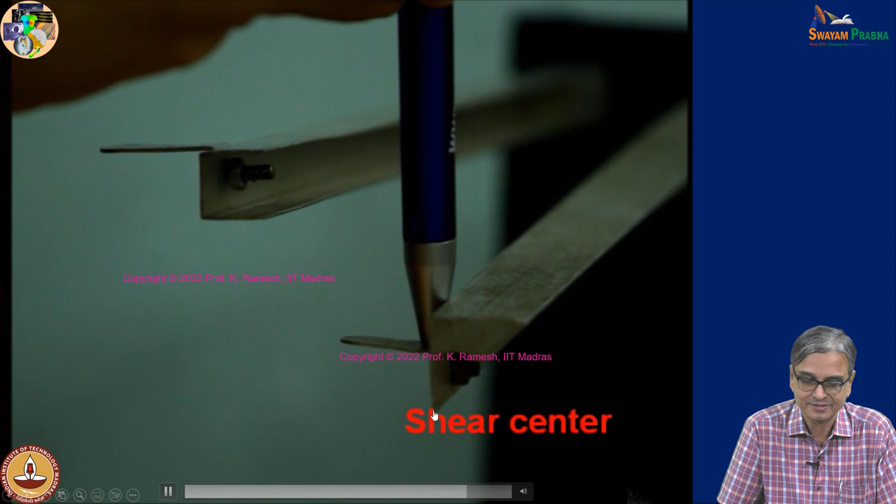So you appreciate there is something called a shear center. I can make the open section like this, to only bend, not twist — and this is an L angle. You can see this is beautifully getting twisted because it is not as stiff as this. So I could show the twist better, and the shear center is very close to this, and you find that this is moving straight.

Now let us take this up, I want you to do it yourself, because that will give you clarity. I have always emphasized, make a sketch of this. I have a T-beam. In our derivation we only evaluate the particular component, but you should also get the practice of recognizing the stress tensor at the point of interest. I have given you the axes, Z and Y, and the x-axis along the length of the beam.

I am taking 4 points. Point A is on the top surface of the beam, point B is on the centroidal plane — this is also the neutral surface — and C is on the outer surface, and you have a point D on the flange. You have to find out what is the stress tensor, and you also have to tell me the magnitude of the stress quantity. Whatever expression we have developed, this is more of a recapitulation.

What happens at point A? Point A is on the top surface. What is the stress that is developed there? What are the stress components that can exist there on the top surface of the beam?

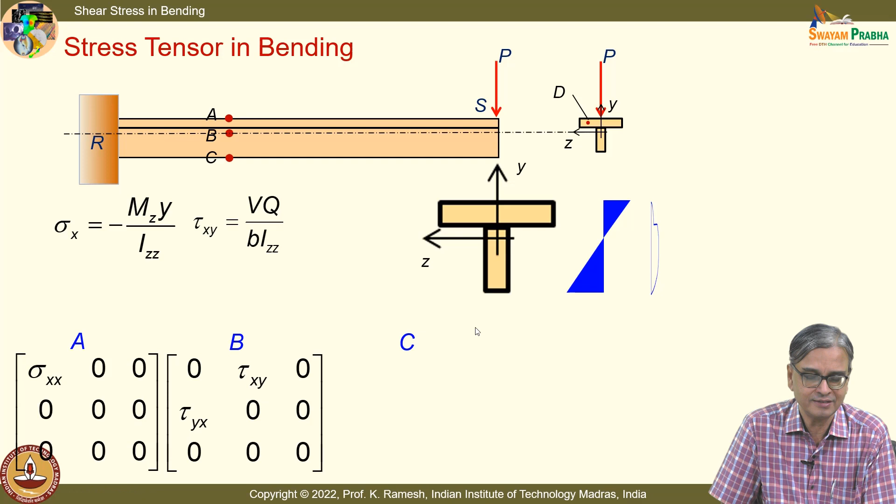Point C is again very simple. What is the stress that you have? You have only normal stress. I have put this as tensile, this as compressive, or you can say the mathematics will give you that. Either way you can take it.

Now I take a special point D. You have to tell me what all stresses can exist at point D. Very good. So in the case of D, I also recognize that the shear stress varies linearly, tau xz. This is a very special point, the most populated stress tensor. Do you have an expression for finding the tau xz?

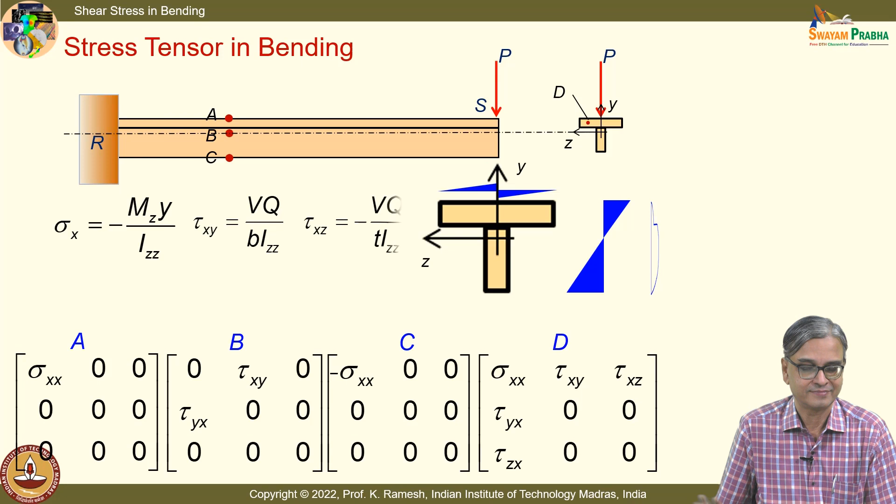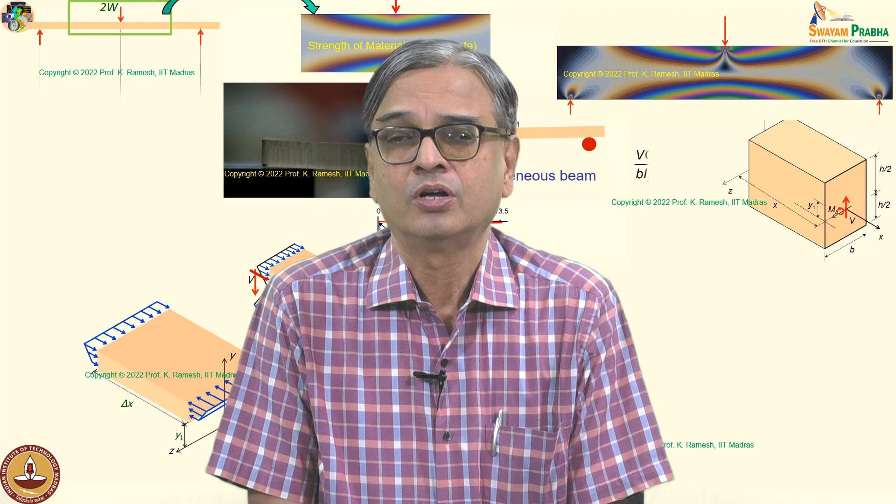Minus VQ by t I zz. In this class we have looked at further discussions on shear stress in bending. We have also been able to derive the basic expression by integrating the differential equations. By looking at the equilibrium conditions for a rectangular cross section, we found the shear stress distribution. Then we moved on to the kind of shear stress possible in an open section like an I cross section, and we have seen that there could be a tau xz component which varies linearly and tau xy which varies parabolically.

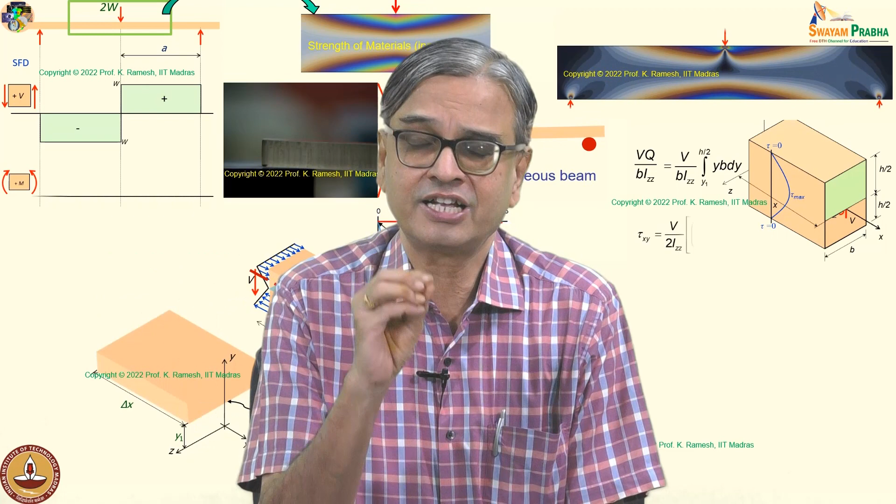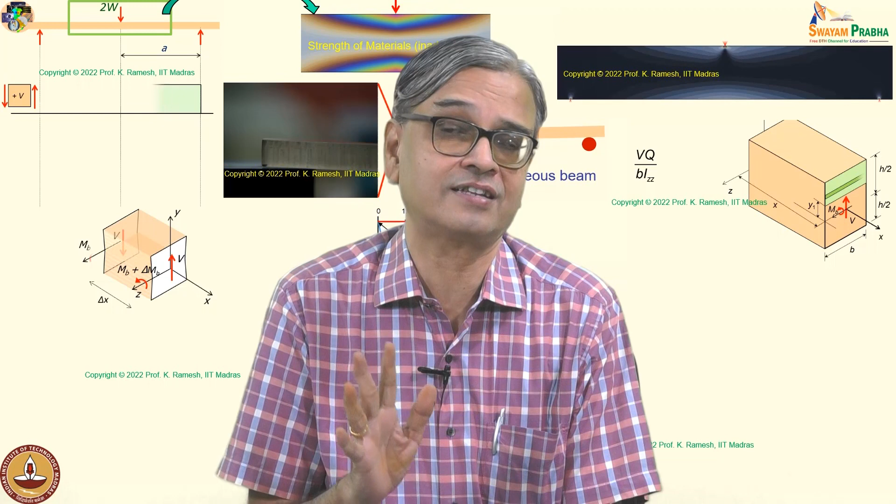We have also looked at certain inconsistencies in the shear stress equations, and we said you have to live with it, and whatever the limitations in the flexure formula, it equally applies to shear stress. You have to have slender beams, that's very important. We have taken a T cross section and found out, for selected points, how you have the stress tensor. It's very, very important. You only have the expressions to calculate the components. The components look like scalars; only when you put it in matrix form can you recognize it as a tensor. Thank you.